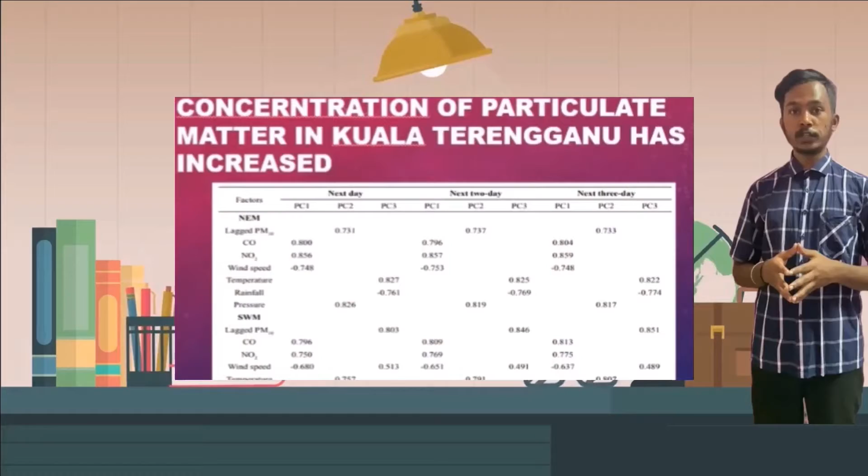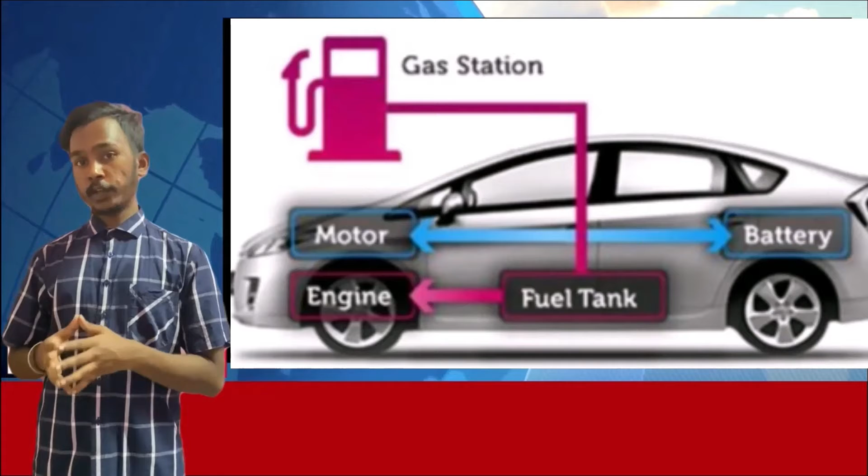Emission and fuel usage from Bus Kita cannot be controlled because it solely depends on the compression ignition internal combustion engine. To overcome this, manufacturers have introduced new vehicle topology where hybrid electric vehicles are introduced to replace traditional internal combustion engine based vehicles. Hybrid electric vehicles can be operated using electricity and fuel to propel the vehicle.

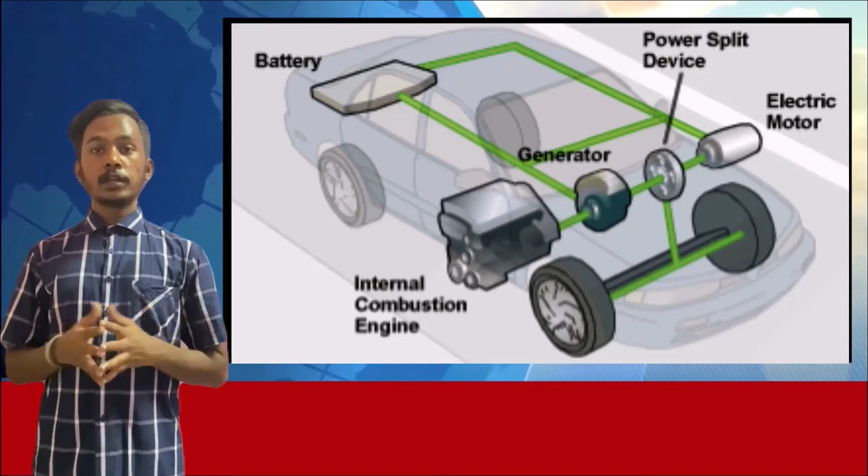Similarly, Bus Kita plug-in hybrid electric bus is introduced in Kuala Terengganu. It consists of an electric machine, energy storage system and internal combustion engine. The internal combustion engine is the only component using fuel in the entire system, and it is only used during rapid acceleration and when the state of charge of the battery is fully depleted. Methodology for this study involves three steps.

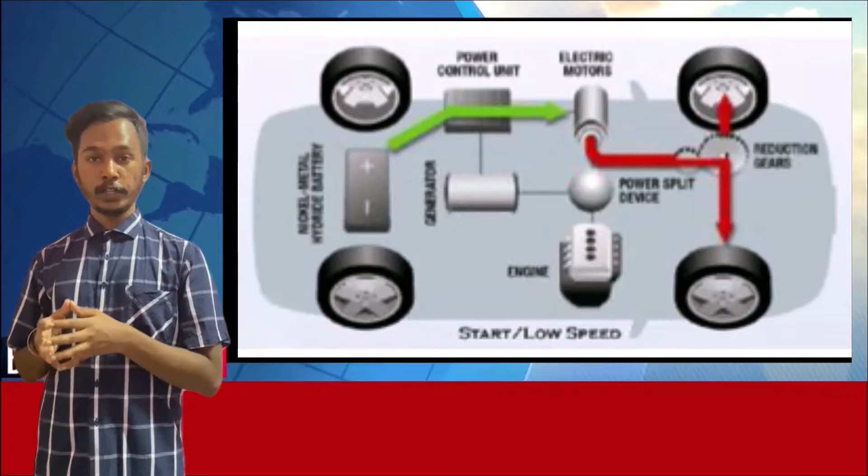First, to determine the parameters and specification of ICE for Bus Kita PHEB. Second, to design a model of ICE components using MATLAB Simulink environment. Third, to validate and analyze the internal combustion engine with Advisor.

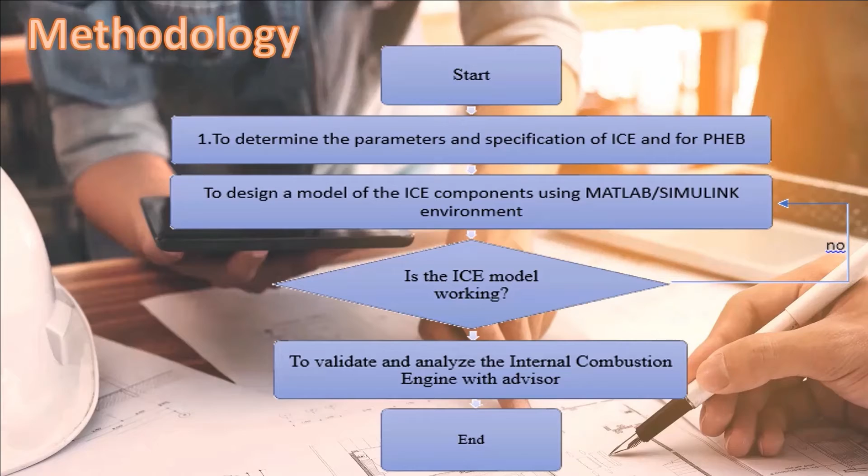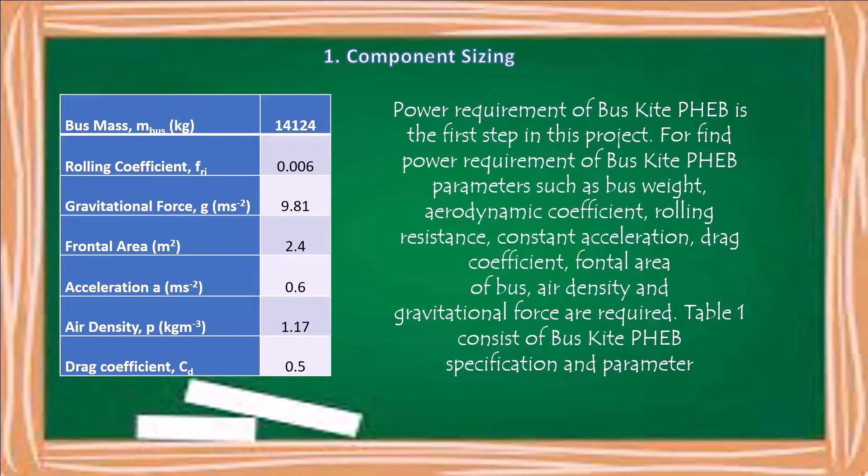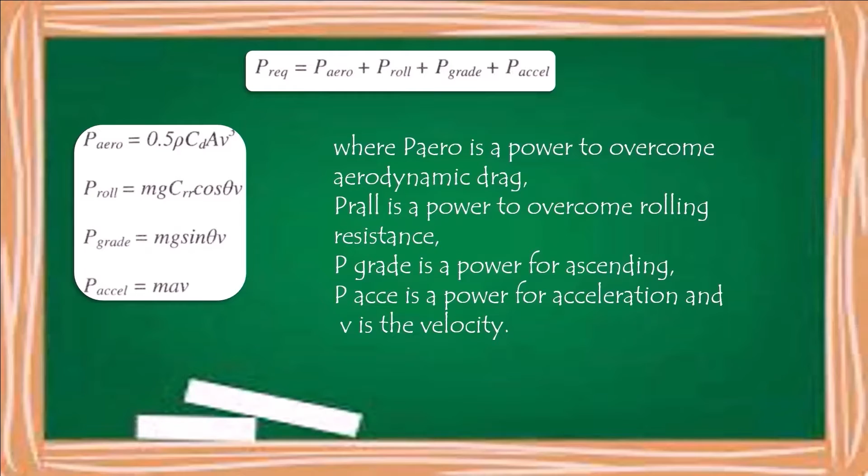Referring to the component sizing of Bus Kita PHEB, the electric machine requires 356.66 kW of power at the peak acceleration of 60 km per hour and the highest gradient load of 5%. The internal combustion engine requires 158.38 kW of power. The energy storage system requires 87.75 kW of power.

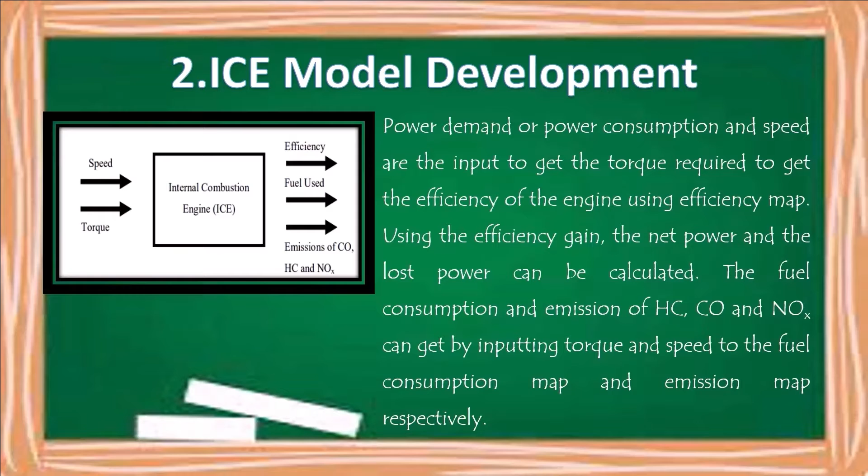The input for the ICE model in MATLAB are speed and torque, while the outputs are efficiency, fuel usage and emission of hydrocarbon, carbon monoxide and nitrogen oxide. This is the model of internal combustion engine for Bus Kita PHEB built using MATLAB Simulink environment.

The third step in this study is validation of ICE using Advisor in terms of output efficiency, fuel usage, and emission of hydrocarbon, carbon monoxide and nitrogen oxide.

Once the model is developed, the next stage is to construct a closed loop system where a PI controller is used so that the power of ICE can be controlled according to load demand. In this study, genetic algorithm and PI controller are used together to optimize the model.

In optimization, the initial population of the PI parameter is chosen by trial and error method. Then, the tuning of the controller using genetic algorithm is carried out with genetic algorithm parameters.

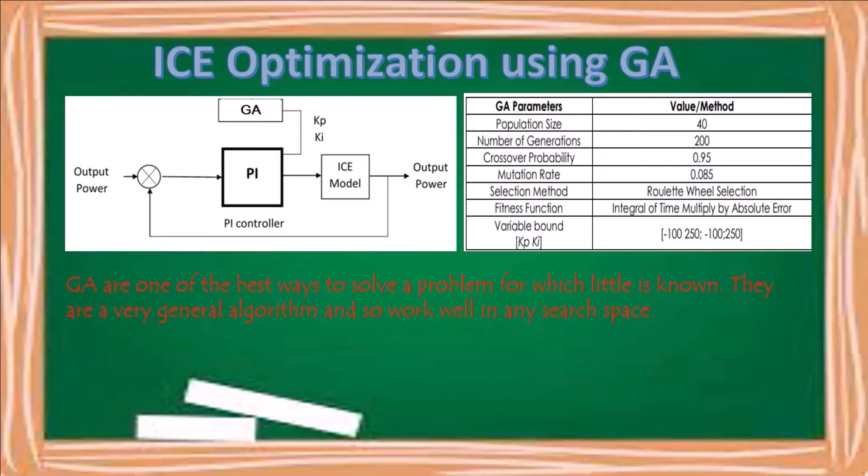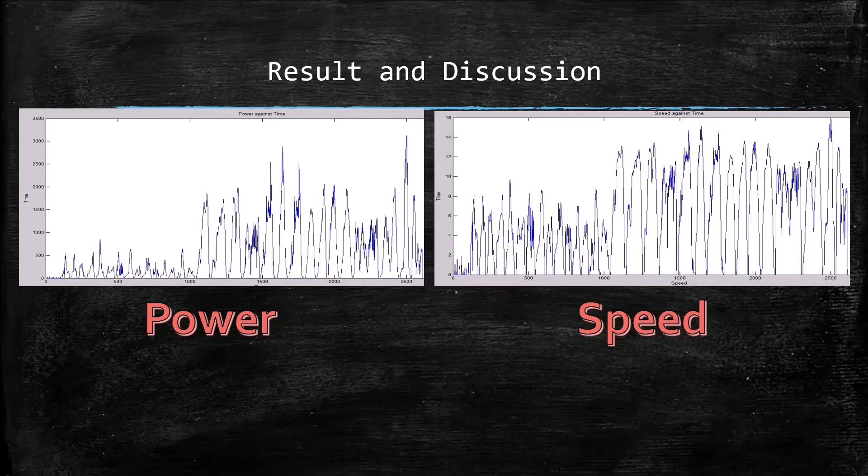The input for the ICE model are power and speed. The data of power and speed were obtained from the Kuala Terengganu driving cycle. From the simulation, the efficiency, fuel use, and emission of hydrocarbon, carbon monoxide, and nitrogen oxide are obtained and compared with conventional vehicles.

From the comparison, it is proven that Bus Kita PHEB is able to reduce emission of hydrocarbon, carbon monoxide, and nitrogen oxide. Bus Kita PHEB uses less fuel to travel the same distance as a conventional vehicle, saving about 33% and 53% annually for low and high density traffic pattern type cycles respectively compared to conventional vehicles.

Also, Bus Kita is more suitable for city driving cycles where the traffic is moving slow and there are more opportunities to recover regenerative braking energy during stop and start events. Most of the energy used to move the vehicle comes from the power grid, which is a lot cheaper compared to fuel price.

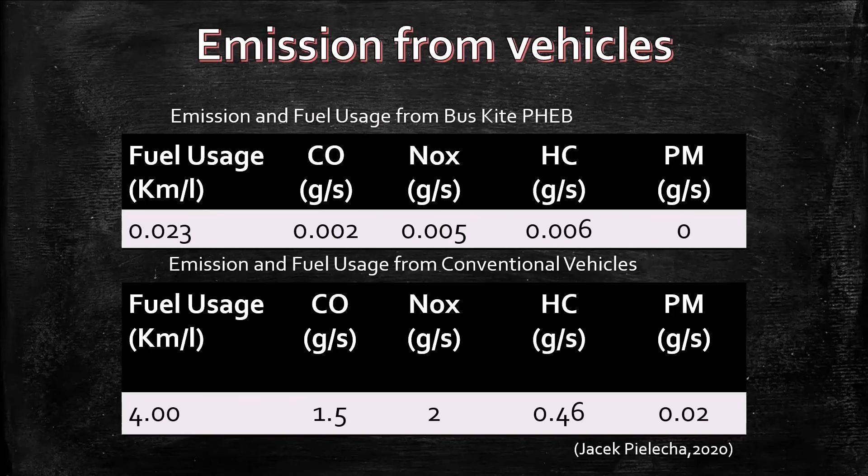First, it's the first plug-in hybrid electric bus in Malaysia. Similarly, in Johor in 2017, the Hino hybrid bus was launched. The difference between these two buses is the energy storage system. Bus Kita consists of a larger energy storage system which can travel up to 70 km in all-electric range mode, while Bus Hino can't since it is a hybrid bus, not a plug-in hybrid electric bus.

Second, it is able to reduce air pollution by controlling emission from the vehicle. Bus Kita uses lesser fuel than other vehicles, as the internal combustion engine is only used during rapid acceleration and when the charge of the battery is fully depleted.

Third, able to reduce fuel usage. Since Bus Kita can travel up to 70 km in all-electric range, the fuel usage is lesser than other vehicles. Fourth, the internal combustion engine for Bus Kita has good commercial potential in the market because it uses lesser fuel and reduces emission at the same time.